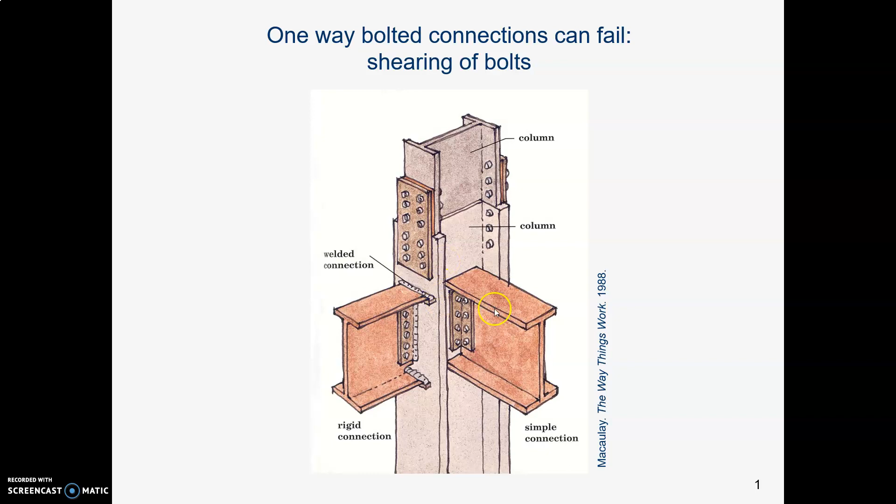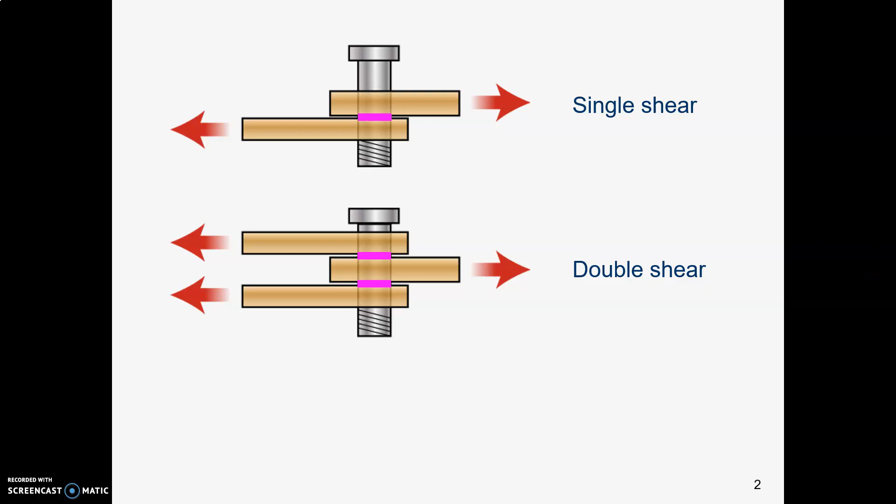And let's look at an example of what that means for us when we're figuring out stress. Here is a bolt in single shear, so there's only one face getting cut across here. And I've just made up some numbers so that we can think about it in our heads without needing our calculators. Let's say there's a force of 12 pounds and of course an equal and opposite reaction of 12 pounds. And I made up an area of 2 square inches for the bolt, which would be an odd size of diameter, but never mind that. We'll pretend the area is 2 square inches.

And let's find the stress. So we know our stress formula is stress equals force over area, pounds per square inch. Our force is 12, our area is 2, so we are looking at a shearing stress of 6 pounds per square inch.

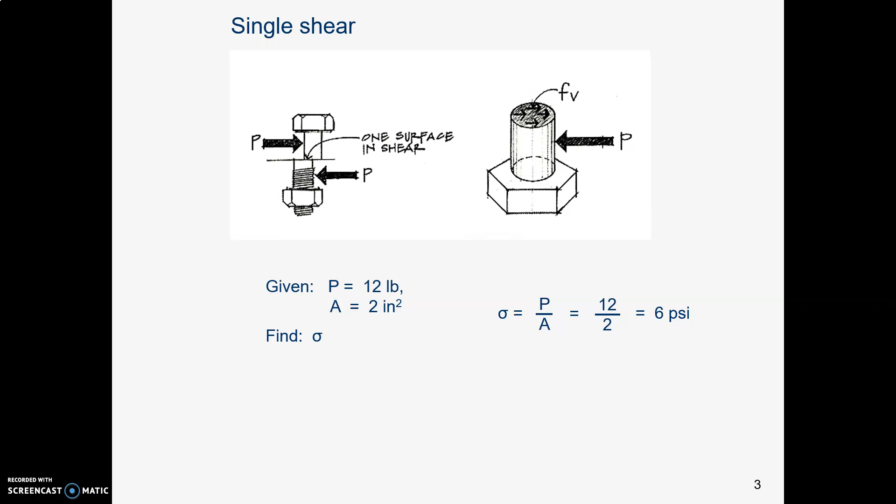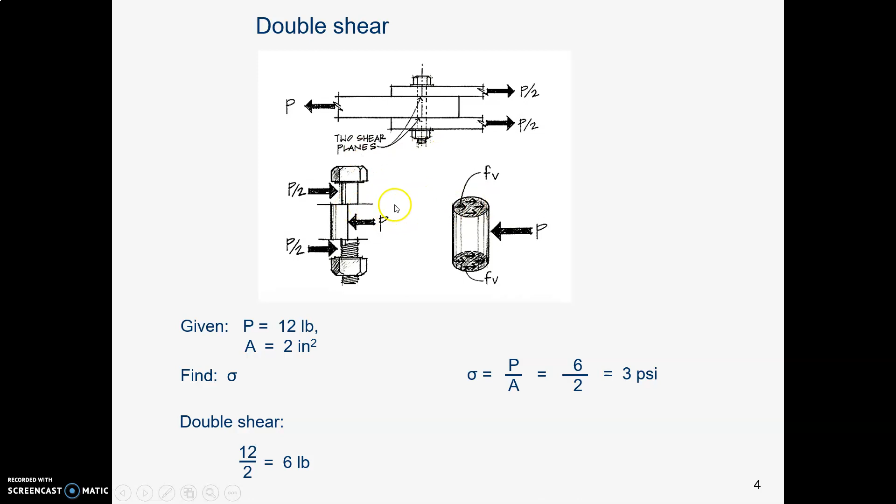Using our stress formula, force over area, now we have a force of 6 pounds over an area of 2 square inches. So now we have only 3 psi at each place on the bolt. In the previous example, we had 6 psi. Now we have half as much, 3 psi.

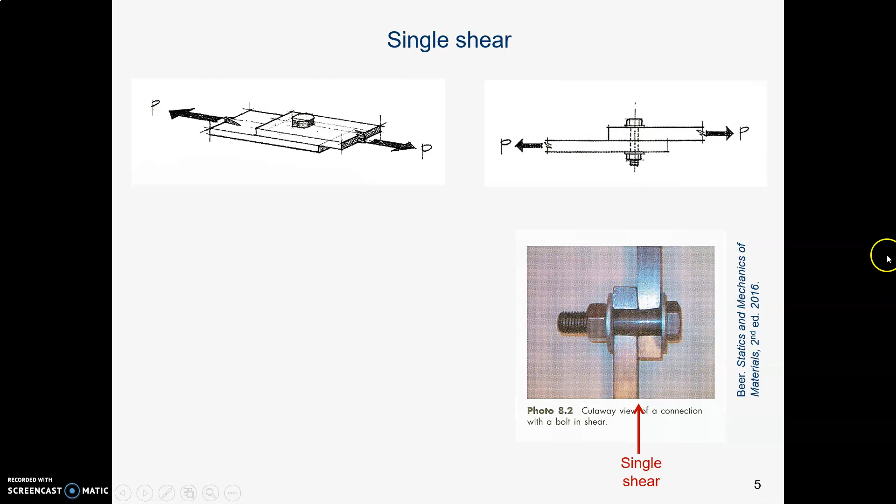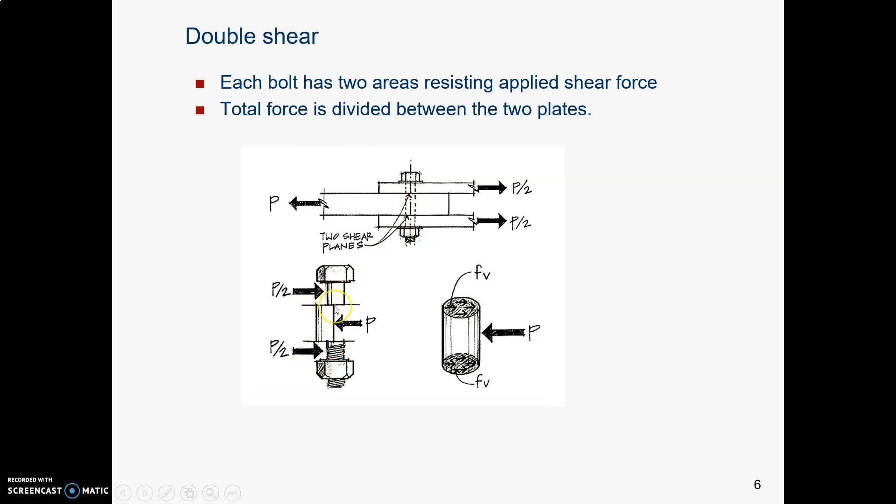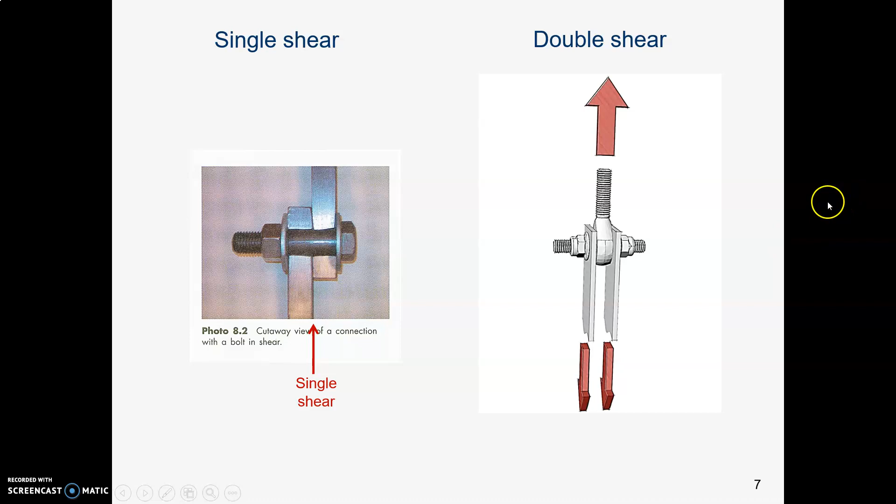And this might remind you of any number of mechanical situations you might have seen. On our old Ford tractor on the farm when I was a kid, we would have a clevis with two bars like that pulling on the implement. Well, I didn't realize at the time that that divided the stress in half. Or you might see a hydraulic cylinder with a clevis mount like that. It divides the shear in half. So single shear, double shear in a clevis.